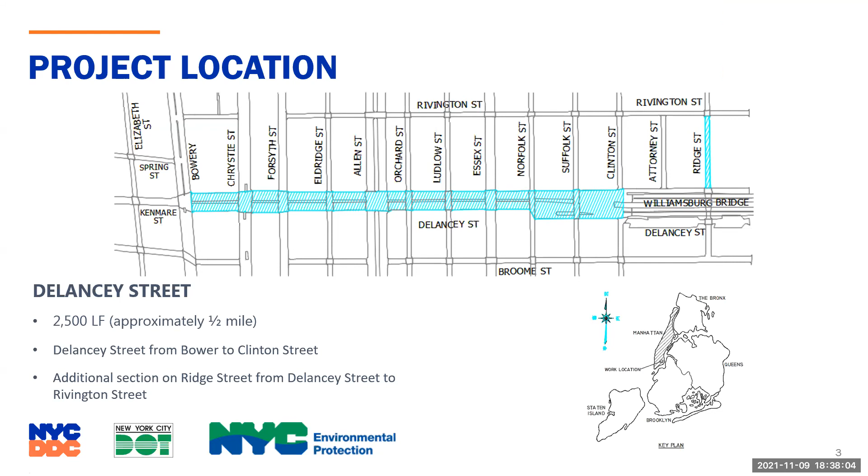So here's the project location. It's about 2,500 feet, about a half mile, from Bowery to Clinton Street up to the entrance to the Williamsburg Bridge here. And then there's also a small portion on Ridge Street from Delancey to Rivington for some small roadway improvements.

Some of the changes, like I already mentioned, the marked one-way bike lane and two-way bike lanes, will be built out permanently. Some of the painted curb extensions will also be built out to increase pedestrian safety. And the new bike refuge area on Allen Street, built in late 2019, was already implemented as part of the design.

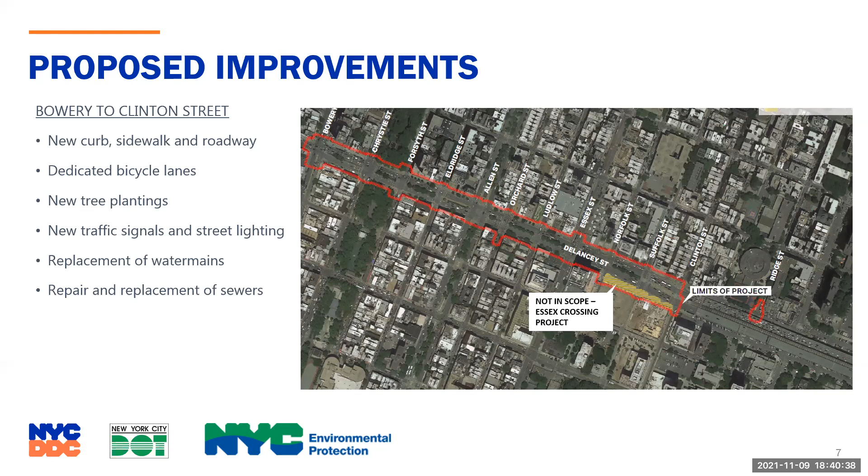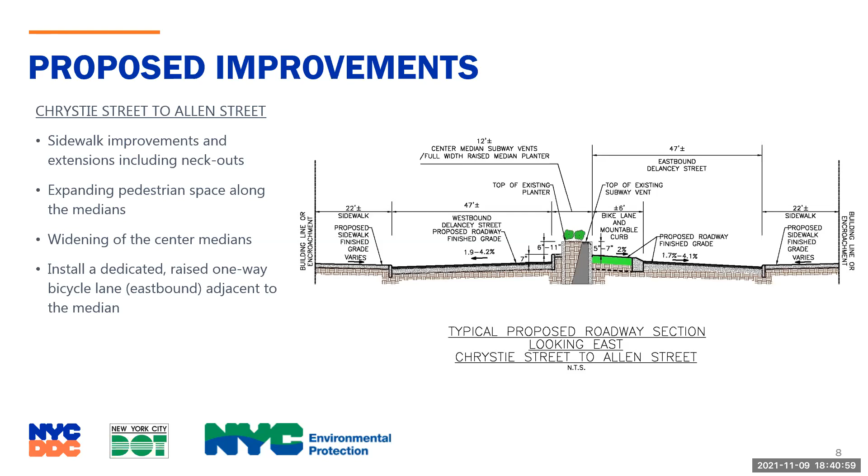Here's a nice cross-sectional view to better understand the bike lane's relationship to the median, again from Christie to Allen. The one-way bike lane will be raised and protected by a mountable curb. On the two-way bike lane, this will be protected by the concrete barrier with an additional railing on top of it as well.

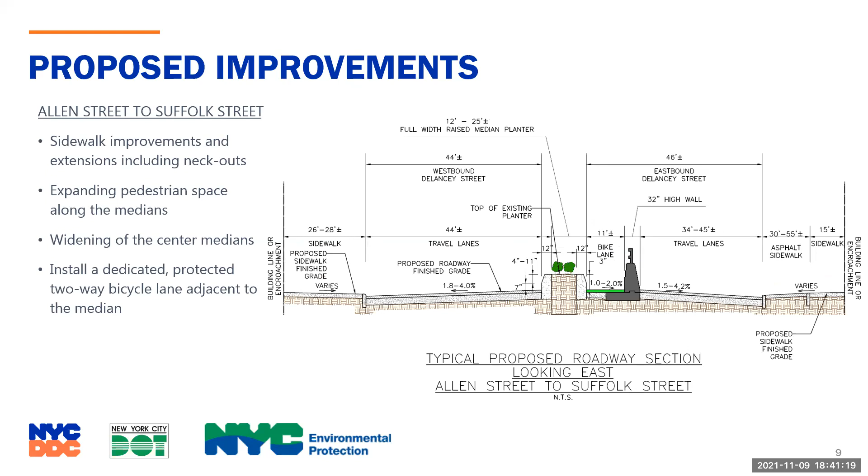And then throughout the corridor, various sidewalk extensions, bump outs, neck outs, and median extensions too, to increase pedestrian safety throughout the corridor.

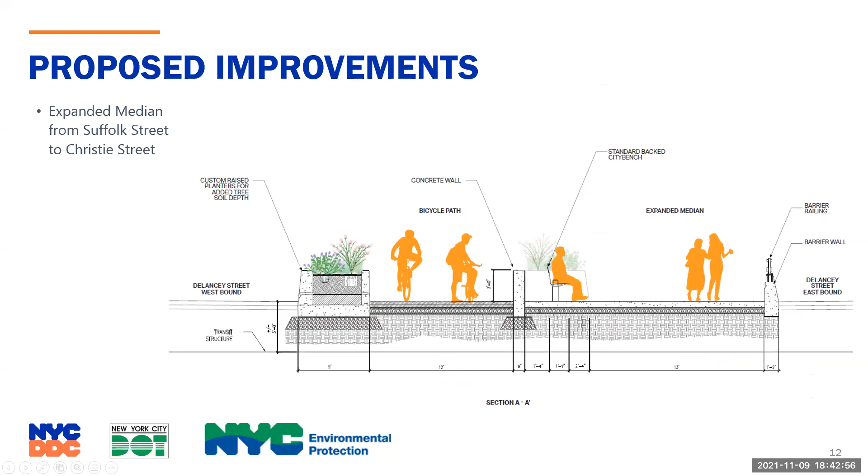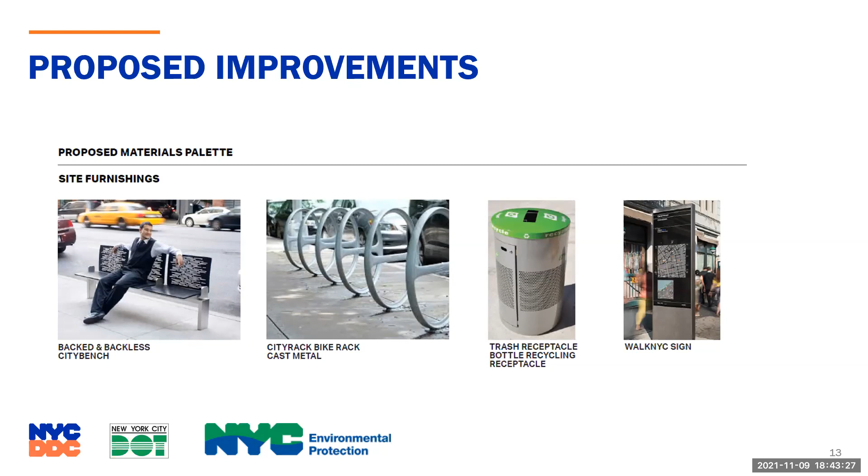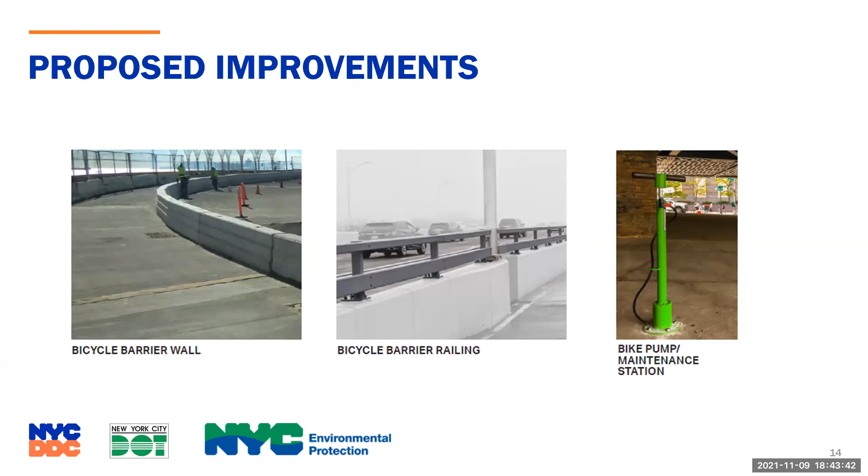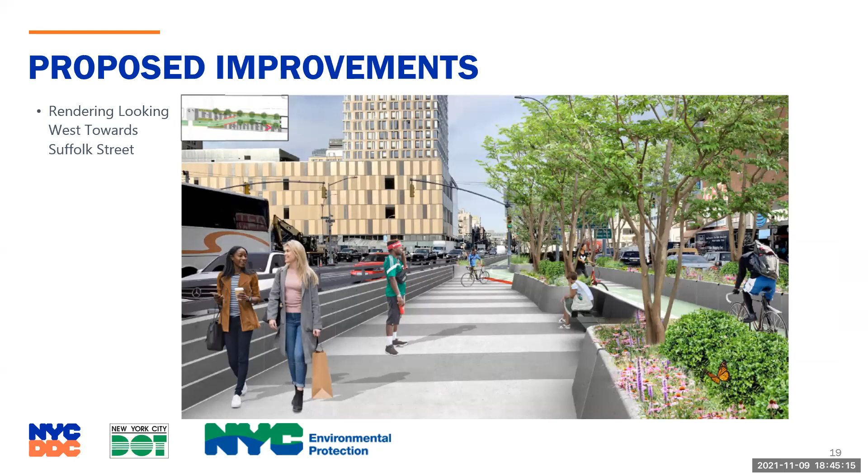And then here's a nice rendering looking west. This would be coming right off the Williamsburg Bridge going into Manhattan. You see the bicyclists coming in to the right, and then the pedestrians in their area on the left, all protected from the vehicular traffic.

And then one more rendering going towards the bridge. Here we see the city racks, the bike pump, and then that pedestrian crossing area for the bike lane, all clearly marked out and delineated.

So here's some community impacts during construction. These will all be temporary. We'll have some roadway lane closures, temporary loss of parking, relocation of the 2 bus stops, potential water main shutdowns, and nighttime and weekend hours, pending NYC DOT OCMC stipulations.

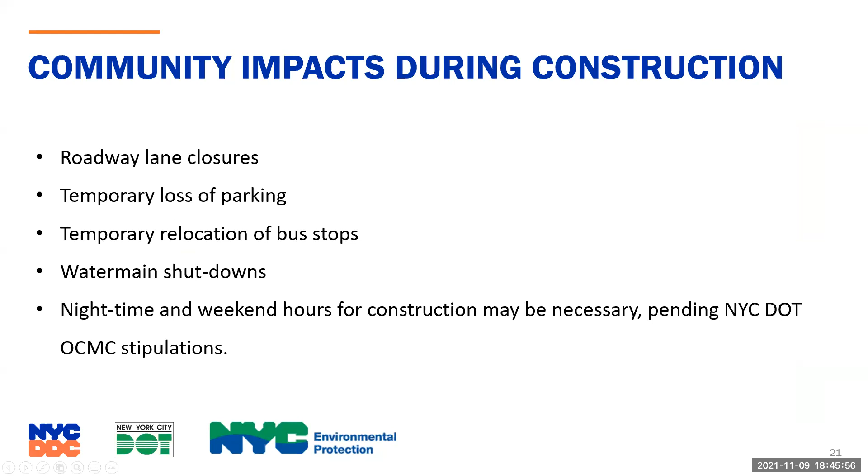And as part of DDC's effort to keep the community involved, there will be multiple measures: project information cards, advisories, weekly bulletins, and newsletters to keep you updated with the progress and construction throughout.

And some other projects that we are coordinating with nearby: we have the Williamsburg Bridge Rehabilitation Project coming up summer '22 to '25, the Essex Crossings expanded median from Suffolk to Clinton Street, and also there's a New York City Transit project at Forsyth Street we are coordinating with.

So project funding for the costs, latest estimate: we have the City and FHWA funding for the roadway work at about 34 million, and then the utilities work from DEP coming in at about 7.6 million.

And lastly, here is our current schedule. We have our presentation to you now, November 2021. We're anticipating design completion in June 2022, with construction to start spring 2023 for a 4-year duration ending in spring 2027, pending on, again, the DOT OCMC traffic stipulations.

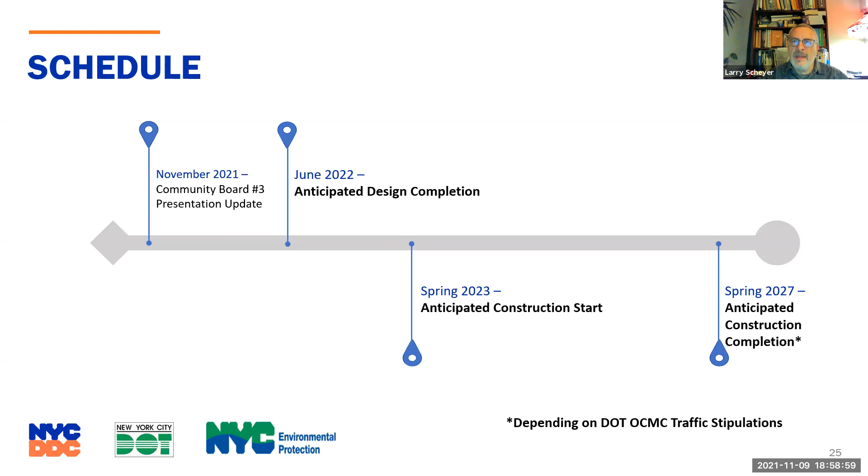And I believe I want to go west. I want to go west. I want to go on Kenmare Street. I'm sorry, let me just jump in. Is there a possibility you go back to that slide that has the layout for further clarification?

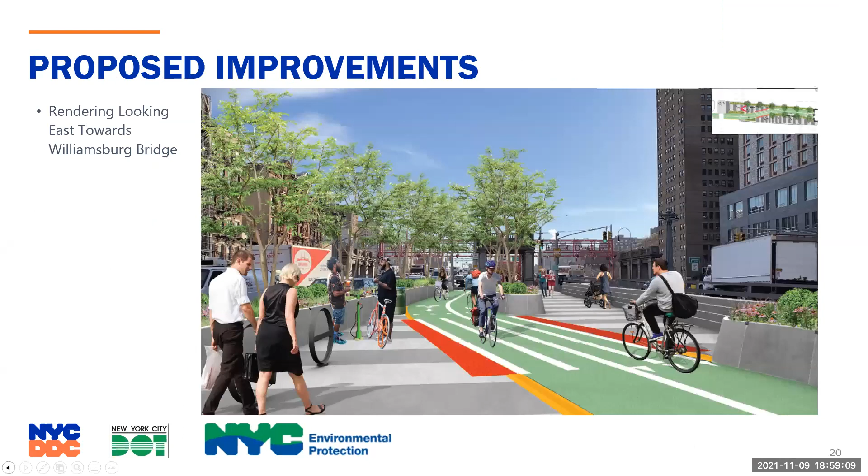I believe this picture is the bicycle refuge at Allen Street. So it's only one way coming from the left, following my mouse here, going to the two-way bike lane towards the Williamsburg Bridge. So to go west towards Kenmare Street, you'd either have to go north or south on the bicycle lanes within the Allen Street median to go left.

Okay, well, what information is provided as to how to proceed west? Again, I'll have to defer to DOT here for the bikeway design, but...

My comment is it really would be desirable to make it safe as a straight shot, paralleling the way that one travels east toward the bridge. It's simplicity in itself, and it's what an ordinary person is going to want to do. And unfortunately, if they're going to be in heavy traffic, that's not the meat grinder that would keep them safe.

Hi Larry, this is Kimberly Ann from DOT. Hi Kimberly, how are you? I don't know that we have someone on from our bike team, I'm not sure they were able to join us tonight. But I think it's a great question, and I don't have the background on why this particular project ends there. I know it's building out what we've already put in the ground and interim materials, but we can certainly look for that answer and get back to you.

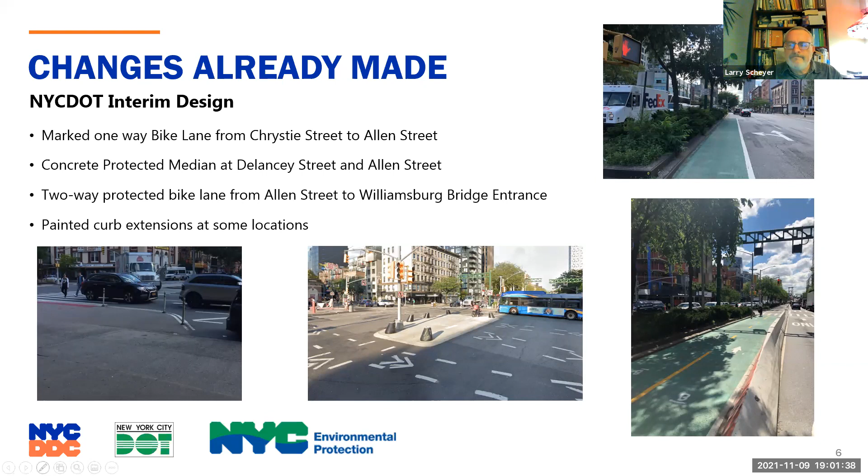And the last thing I wanted to ask about, maybe somebody else can follow up on it, was how you plan to deconflict, in front of between Suffolk Street and Clinton Street, the pedestrian and bicycle crossing. Right, shown by the red. Yeah, so this crossing will have signage, and then also the red and yellow delineators serve to mark out the bike path from the pedestrian area.

You know, what worries me is that somebody not paying attention will hit somebody in a perpendicular manner and cause an injury.

It looks like as DDC works through the final design, there's probably some special adjustments that we can make, making sure that the visibility is there, any additional markings like adding rumble strips or flashing lights, something that will get people's attention so they don't just wander through or speed through. I think we can add some of the standard treatments we do for bikes at pedestrian crossings like this and work with DDC. The bike lane in this case looks fairly visible for pedestrians crossing, but we'll certainly work through those details with DDC. This reminds me of what you have in Hudson River Park and the crossings of the bikeway there.

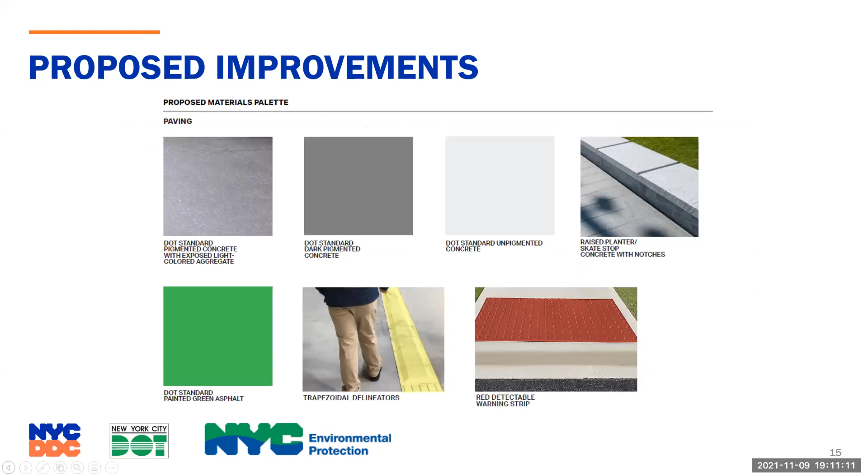Hi, thank you. Looks like a beautiful bikeway, and it's going to be really nice when it's done. I also have a concern about the raised part of the bicycle lane. If someone's going to fall off, it's going to be me. Anything the city can do to prevent cars from parking in bike lanes or veering into bike lanes, I'm 100% there. I drive and bike all over the city, and the Clinton Street that goes over Grand and to Delancey, there's always cars parked in, always. I don't know why that is, but whatever you can do to keep that from happening is great, and whatever you can do to keep me from falling off is also appreciated. That's all I have to say.

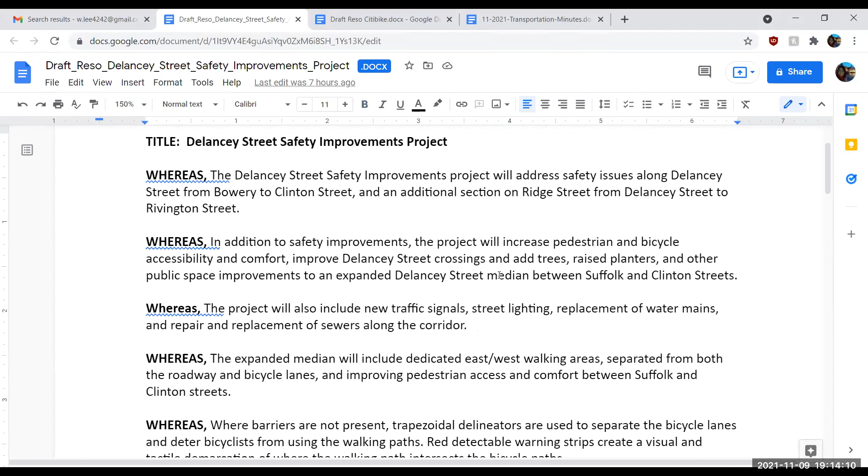If you want to chop this up a little bit, if there's anything you want to add based on the information you've heard tonight, based on concerns you've heard tonight, let's do so. I think this is pretty comprehensive. I want to thank Susan and Calvin for putting this together with the information they had.

You want me to read through it, or you want us to go and attack a specific whereas or resolve clause? Committee can jump in at any time.

Do we want to add anything about asking DOT to look at improving the safety corridor west of Allen Street towards Kenmare, or not? Any disagreement with that? Is that language you want to put in?

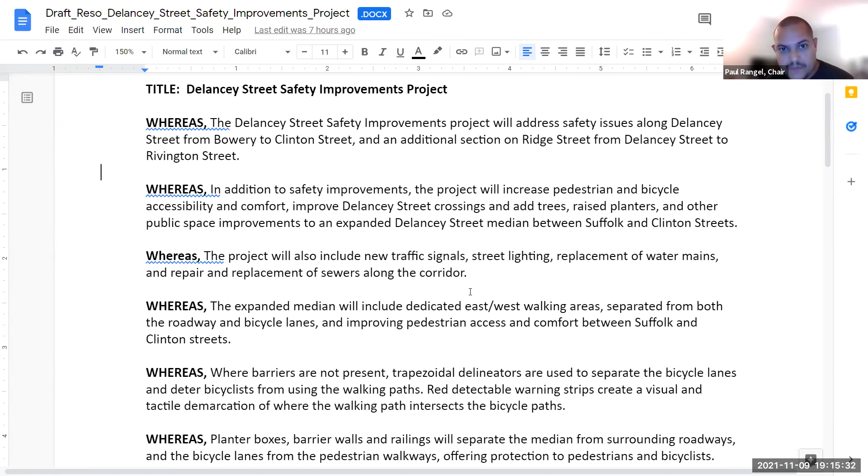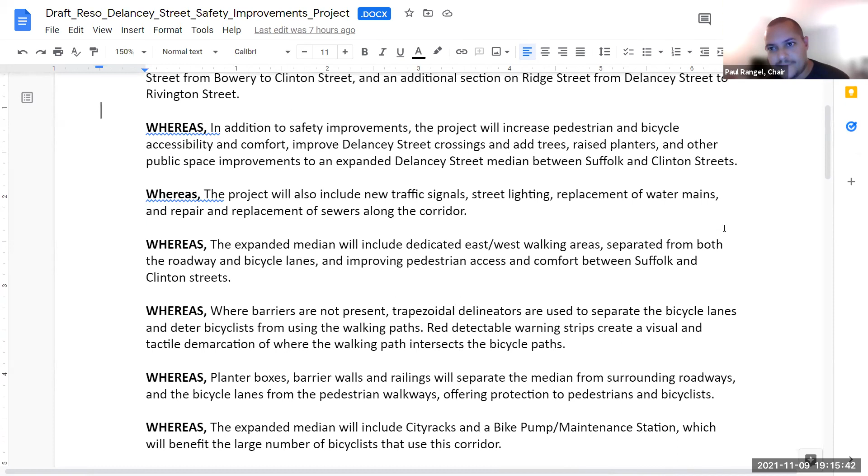Michelle, go ahead. I'm drafting an amendment to add for that, so I can send it in the chat in a second. Look at that, thinking in sync today. Lee and Michelle, it's a tag team right there.

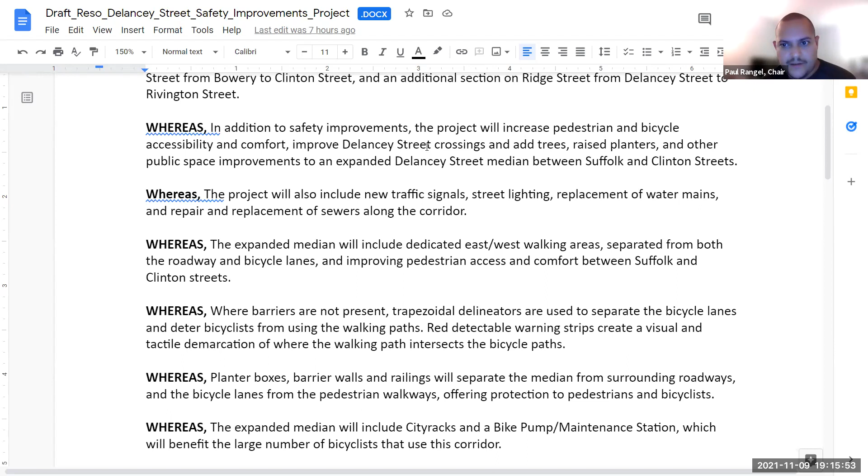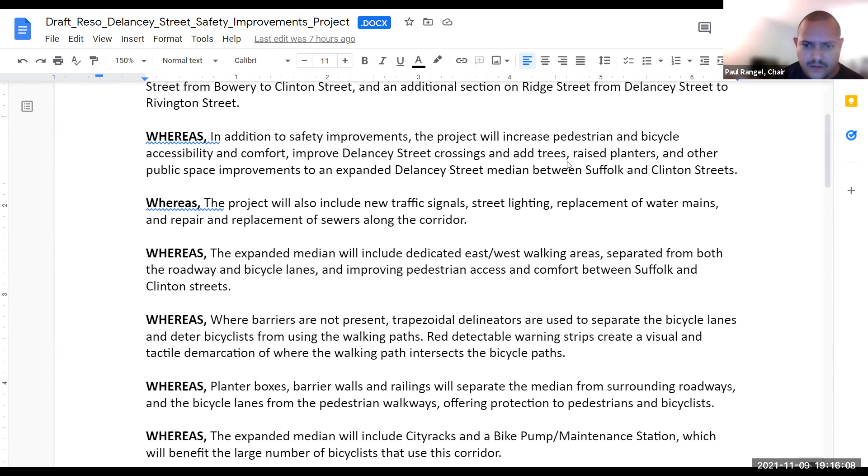So I'll wait on that and see how we insert it. Is there something else that we should be putting in? Oh, hold on, let's read this up first. It's in the chat, I can read it. Therefore, be it resolved that DOT should consider adding a westbound protected bike lane west of Christie Street.

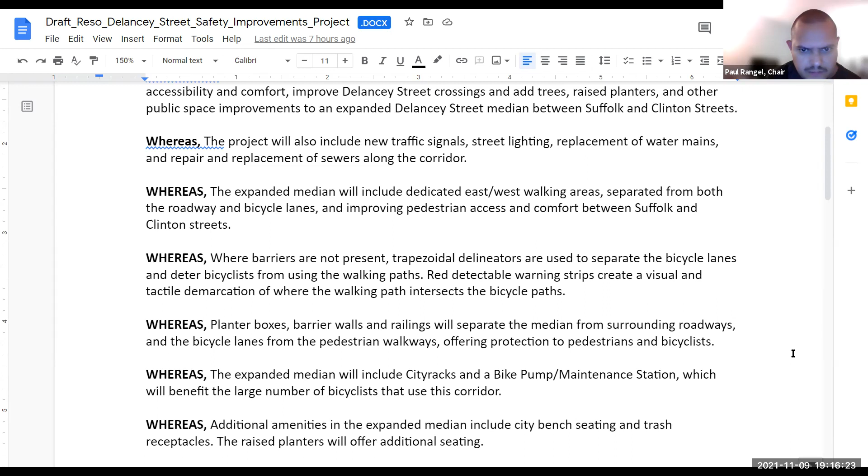Okay, do you have that, Wendy? You can just copy and put that in. So I make a motion to add this: therefore, be it resolved. Is there a second? Second. Any objections to putting in this resolve clause?

Is it west of Allen Street? Actually, did I mess up? My confusion was it west of Christie or Allen? I know there's some questions about going to the Bowery and stuff like that. So was it after Allen? I'm going to go back to Mr. Wald here - you mentioned it earlier. Was it west of Christie or west of Allen?

Larry Sherritt said it's a one-way eastbound between Christie and Allen, but there's nothing westbound between Christie and Allen. That needs to be a pair of bike lanes there, and there's nothing at all in the plan between Christie and the west of Bowery. So it's west of Allen, between Allen and Christie. Is it Allen and Christie or Allen and the Bowery? West of Allen. We just put west of Allen. Fine, okay.

I know I kind of just opened this up a little bit asking a community member for their input. Mr. Shire, I'll quickly go ahead with your comment. And to clarify the prior comment, also suggesting looking at extending in both directions between Christie and the Bowery. Okay, alright, thank you. You're welcome.

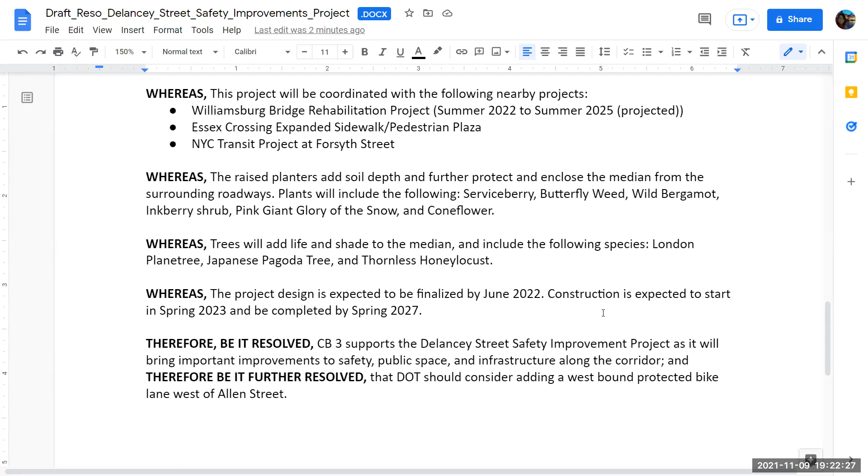Okay, I believe Colin tried to say something about that, did you have feedback? No, again, I have to defer to DOT. This is something they'll need to work out with their bike group for where they're going to put proposed one-way or two-way lanes, and how it connects to their larger bike network throughout the city.

Yeah, so the thing is, there's obviously a trade-off sometimes between avoiding traffic congestion and creating protected bike lanes. I want there to be flexibility for that trade-off. So I'd like to say adding a westbound protected bike lane west of Allen Street, all the way to the Bowery, if possible, if you've written that.

And also here, extend the eastbound lane to start from the Bowery to Christie, and all the way to the Bridge. See, there's a block there. I think it's a block of eastbound missing, and there's several blocks of westbound.

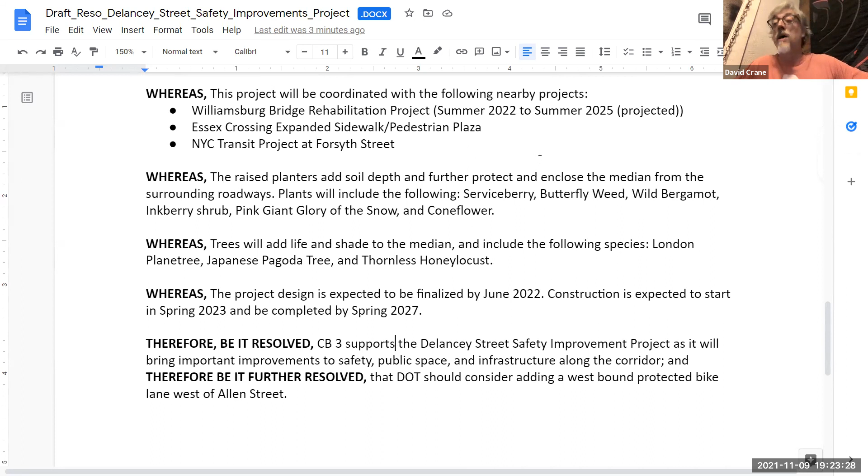Might just want to simplify it and say two-way bike lanes existing between the Bowery and the Bridge. I think we have language for that right now, Michelle just sent it over to me. Therefore be it resolved that DOT should consider having a two-way protected bike lane for the entirety of the project between the Bowery and the Williamsburg Bridge.

Great. And then can we add, perhaps at a minimum, there should be street markings to indicate shared lanes where dedicated lanes are not possible?

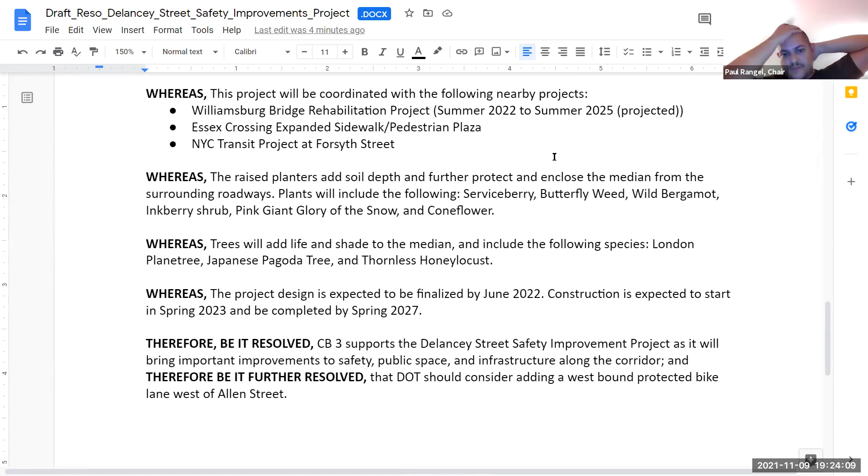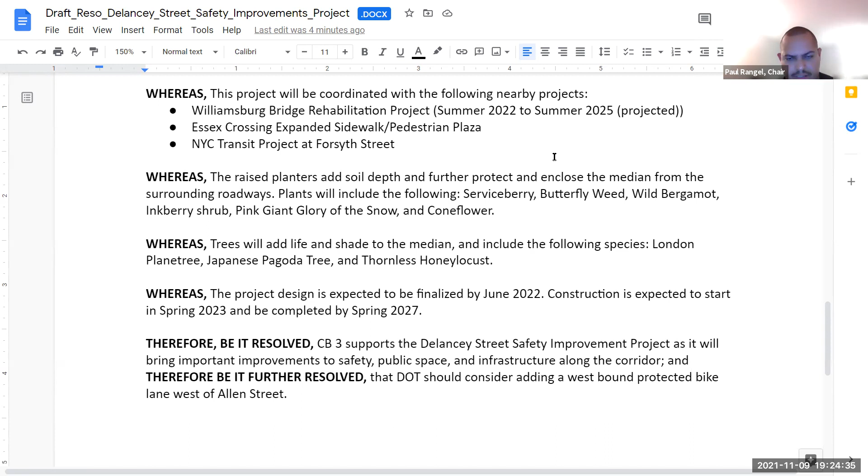Hold on, let's backtrack for a quick second. Are we going to get rid of this further resolved and replace it with this new further resolved? I'll type it into the chat, give me a second. I sent it to Wendy. Oh okay, Wendy, just put it in so we can see it on the Word document.

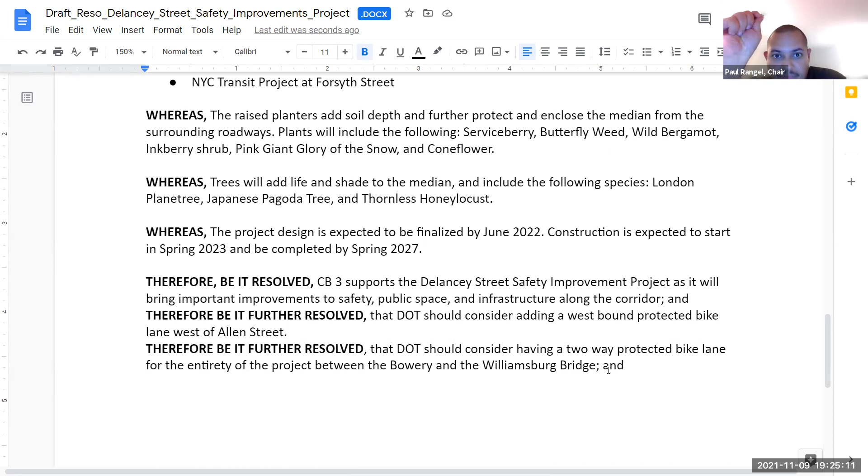So David, help me out here. We just said yes to putting in this further resolved as it was with the west of Allen Street. We're going to replace the Allen Street one with this specific resolve clause. Yes, I would like to see that. Okay, committee, everyone in favor of replacing the previous further resolve clause with this one? I'm not hearing any objections, so the new one stays in, the second one comes out.

All right David, your next point. You're on mute now, take yourself off mute. Me? I thought I was done. I thought you had a second point you wanted to bring up, you said you wanted to add something on? Oh, you know what, I don't know.

I don't know if we need to go into the details of what I was talking about. I think DOT or whoever's planning this, the lead agency heard me. But at a minimum, there should be street markings where a dedicated lane is not possible. We could add that phrase, and that would be a good addition here. Right now there isn't, and we actually got kind of caught between cars, and it was like, what's going to happen next?

Partly because there's a lot of curb lane activity happening for that last block or two of Delancey. I don't remember exactly what it was, but I remember suddenly feeling that—if you cycle, you know the feeling where you're suddenly stoked for action because you're not sure what's about to happen, because you're kind of stuck. That definitely happened there, and shared lane markings can help.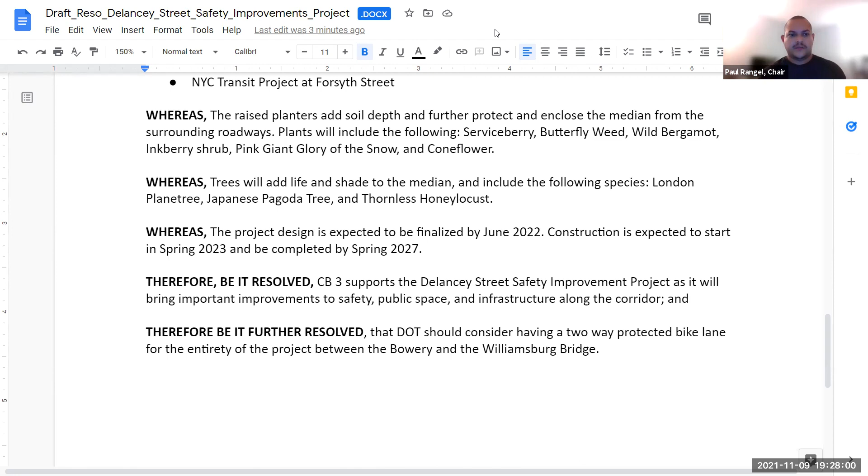Are we good as is? Any objections to this resolution? If not, this is going to go through. I'm hearing no objections, so I don't need to take a formal vote, right, David? I can just go right through with it. Sure, if you want, you can pass it without a formal vote, but there's so few of us also. Yeah, okay, so we're going to move through it. This is fine, this is passed, then we'll come up with it.

Thank you, that was good. All right, so let's go to our next agenda item, which is the Citi Bike infill.

I have Mabel Kessler and David Andrew presenting for the Citi Bike infill. That's why I have this listed.

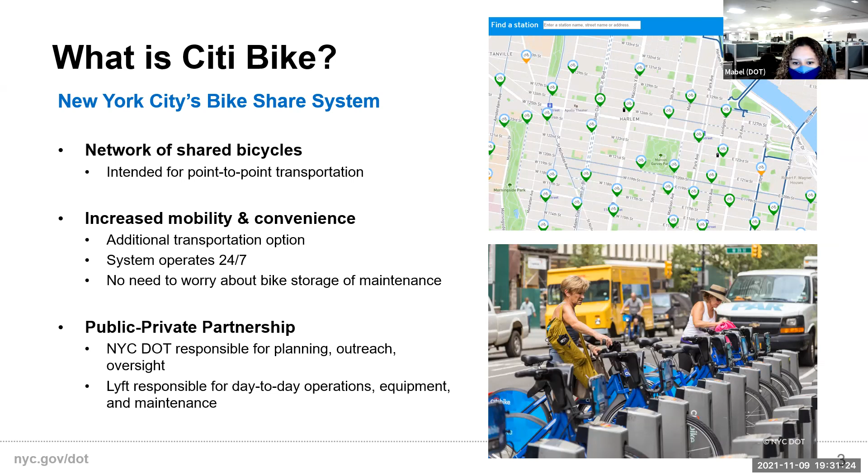Citi Bike has been in operation since 2013. It launched in Manhattan south of 60th Street and in parts of downtown Brooklyn, with 330 stations and 6,000 bikes. Starting in 2015, we expanded the system and more than doubled its size by the end of 2017. The system expanded to the Upper East and West Sides of Manhattan, deeper into Brooklyn, and into Queens for the first time.

In 2019, Lyft acquired the system and we began our Phase 3 expansion, a major investment that will more than double the existing service area to 70 square miles and triple the number of bikes to 40,000. That will make this bike share system the largest in the world outside of China. Citi Bike is now in four boroughs and continues to expand into new parts of the city while adding capacity to the highest-demand areas.

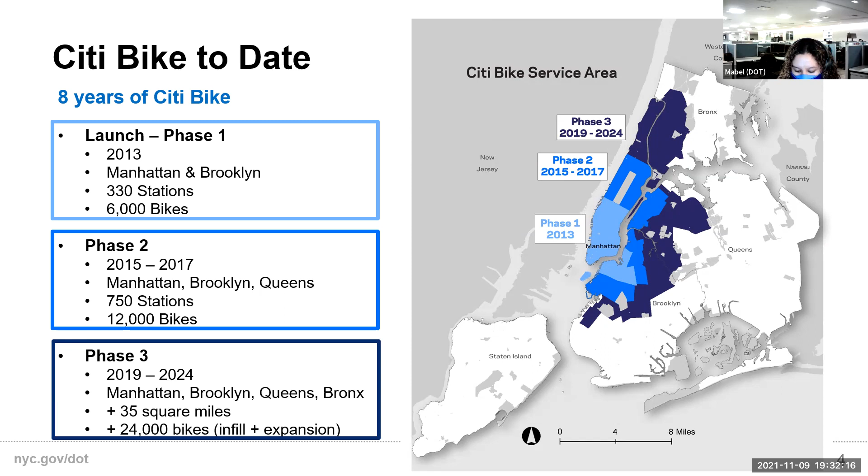And the system is very popular. Since its launch in 2013, there have been over 135 million trips taken on a Citi Bike. The program has over 165,000 annual members. And during the busy summer, spring, and fall months, we routinely see nearly 100,000 trips a day. In 2021 alone, we saw multiple 120,000 plus ride days. And even despite the COVID-19 pandemic, Citi Bike ridership didn't collapse the way that other modes did and was at 95% of 2019 levels.

So now we'll discuss a little bit more about our phase 3 in detail, which consists of 2 distinct but related efforts: the expansion and the infill. Expansion brings Citi Bike to new parts of the city and is nearly halfway completed, while infill adds capacity to the phase 1 and 2 service areas, which are shown in gray in the map. We anticipate completing installations for all of phase 3 by 2024.

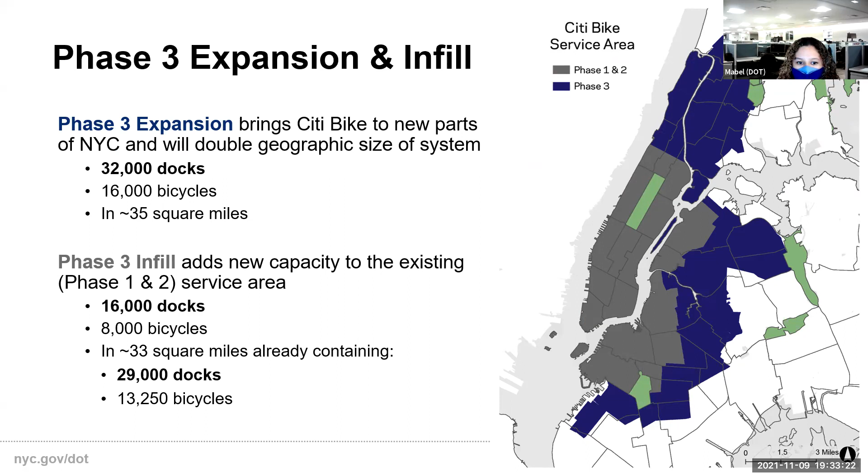So now we'll talk a little bit more about why we need infill. New and additional dock capacity is needed in the busiest parts of the phase 1 and 2 service areas to support increased demand as the system and the ridership grows, and also to meet existing unmet demand. Infill helps the system function. Rebalancing alone is not enough to accommodate the increasing demand, so infill is critical to improve overall operations.

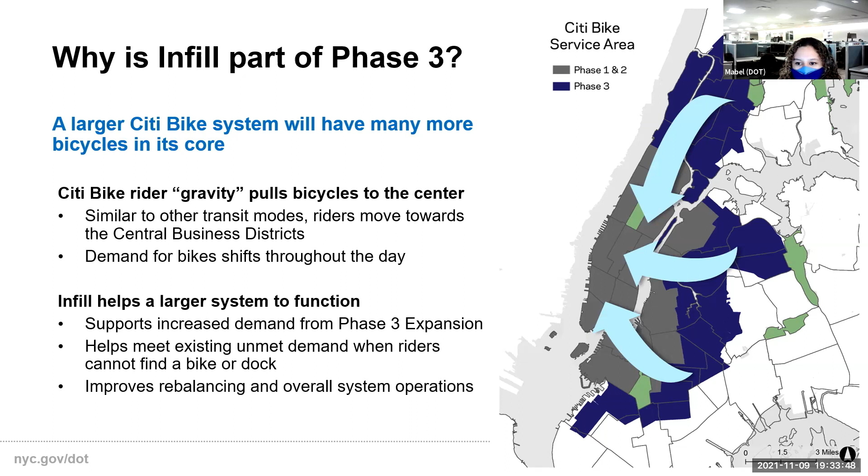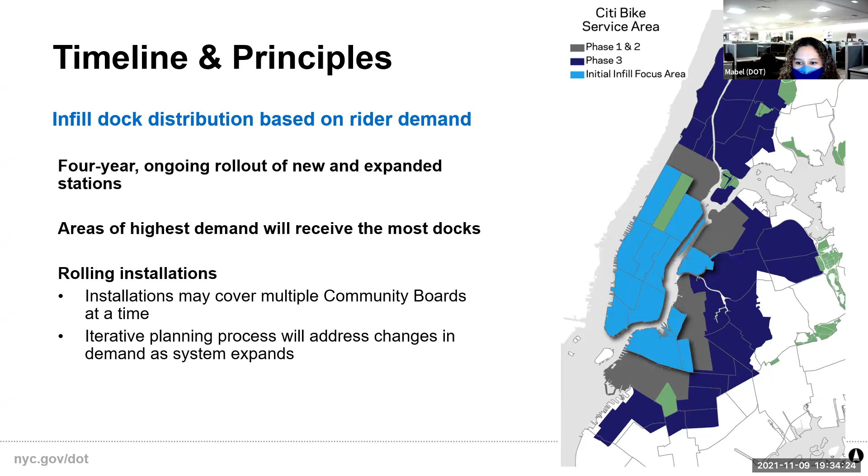So we're adding 16,000 docks to the system over the course of 4 years, and we're in year 2, so currently about 35% completed. Site selection for infill is driven by demand and filling network gaps where we don't have stations within the service area, and we'll discuss this in a bit more detail. Infill is a rolling and iterative process. We work in multiple community boards at a time, and this really helps us meet rider demand as the system continues to expand.

For our planning process, we combine a number of inputs. We incorporate community feedback via our online feedback portal that is open throughout the duration of phase 3. Our data-driven demand modeling and spatial analysis, as well as our technical on-the-ground siting criteria, shows us the best places and appropriate sizes for stations to ensure that we're meeting demand. And we work together with Lyft and the folks at the Manhattan Borough Commissioner's Office to notify community stakeholders and adjacent property owners in advance of installations. Once installations begin, our stations are monitored and maintained over time.

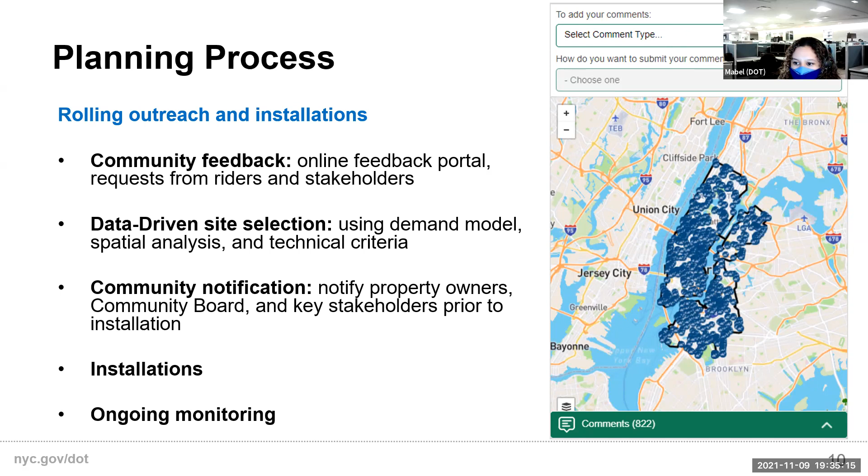So now we're going to take a look at our infill planning process and identifying where infill is needed. Our high-level goal for infill is to improve the system by reducing the instances where riders can't find a bike or a free dock. To help us with this, we created a model that looks at existing ridership patterns and identifies areas where we need to increase system capacity to meet demand.

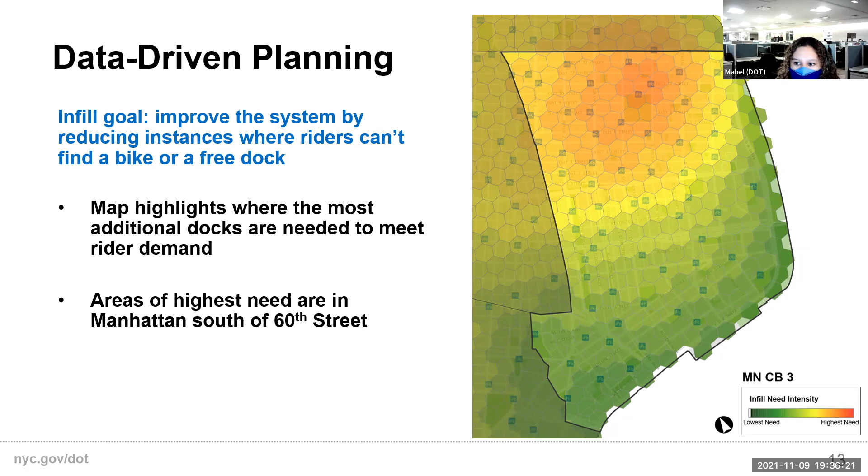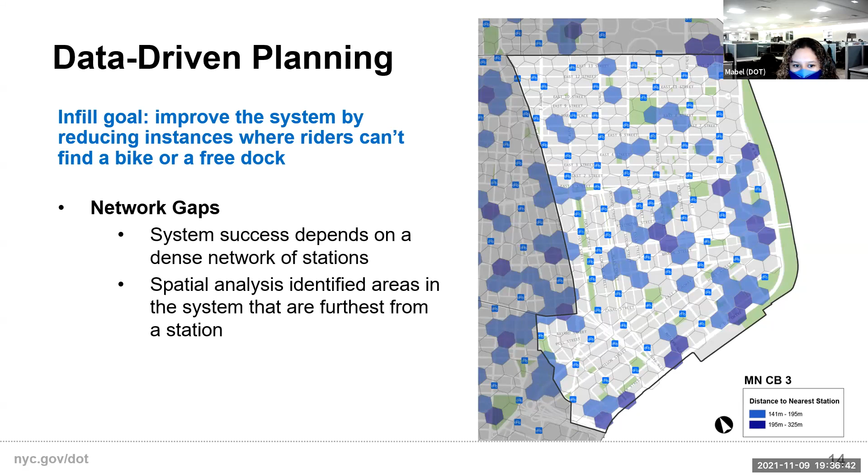One of the limitations of this model is that it measures demand where there are existing stations. And as we know, there are some areas where we do have network gaps. So we have a spatial analysis to define where we currently have network gaps, which means that there are areas in the system that are furthest from a station. So we used these 2 layers, the demand map and this spatial analysis, to create an informed station siting and sizing tool. So here you can see the two layers overlaid.

So as per the demand model, in Community Board 3, we need about 1,800 more docks to meet the demand that we've currently measured in this board. And within this proposal, we're proposing 683 additional docks, and that'll be in the form of reinstalling stations, station extensions, equipment swaps, and new stations.

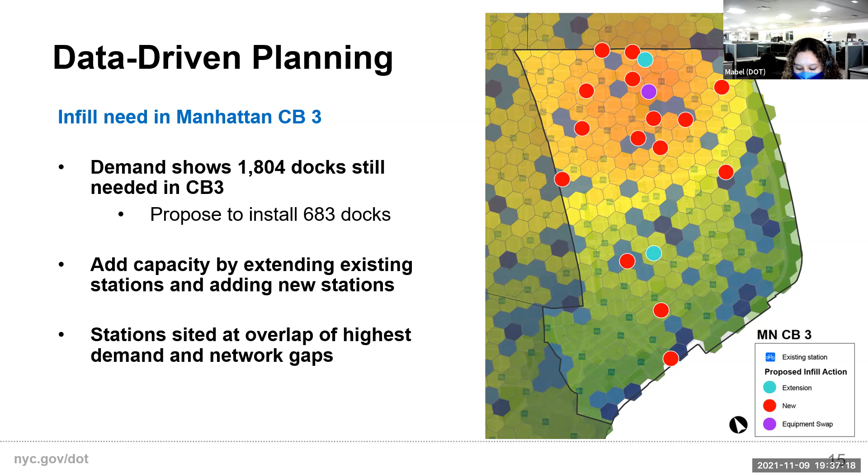So these next few slides will just go over the different infill proposals that we have for Community Board 3. Please note the key on the slide. Each number on the map corresponds to the site and its place on the list, and the different colors correspond to the infill type. Teal is for an extension at an existing station. Red is when adding a new station. Purple is for an equipment swap at an existing station. And I can explain that more when we're talking through the particular site.

And so I'll just start reading through, and after I go over the sites, we'll have time for comments and questions on any of them.

So the first one I'll start with: we have a sidewalk station on the north sidewalk of South Street at Pike Street, and then we'll be adding a roadbed station on the east side of Rutgers at Henry Street, and also a roadbed station on the west side of Orchard Street at Grand Street. For this existing station at Norfolk and Broome, we'll be extending that sidewalk station.

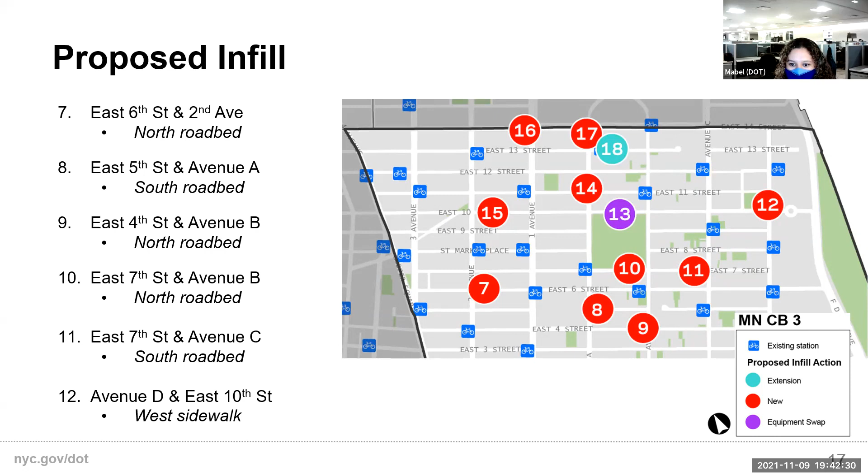All the parking we've already lost. And these are a lot of stations you're putting in. Okay, thank you. Thank you, Danielle.

Okay, Susan, I saw your hand. Go ahead. Thank you.

So just to give a little background on this, DOT did give Kelvin and me a preview of what this was going to be, I guess about 2 to 3 weeks ago. And my objection at the time was that we needed to give information to the community board and the community ahead of time to really be able to look at these sites. We're not approving them, but we're giving input. And I will tell you, sometimes they're very good locations. Sometimes if you know the area or use the area, you will find a certain location is not the best for that area.

There's no question there's a demand for more Citi Bikes. During rush hour, they're all gone, and we do get complaints that there's not enough installations, but we will also get complaints about where they're placed. And even in the preview that we got in the office, we had photographs. You really can't tell from East 4th Street and Avenue B.

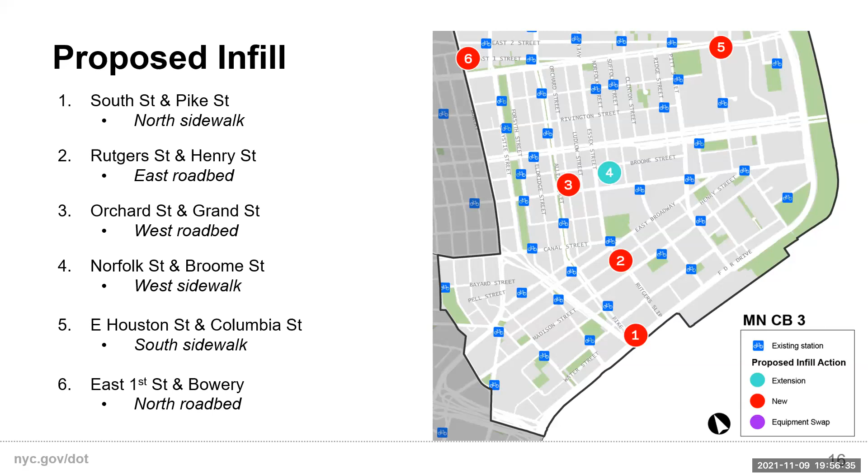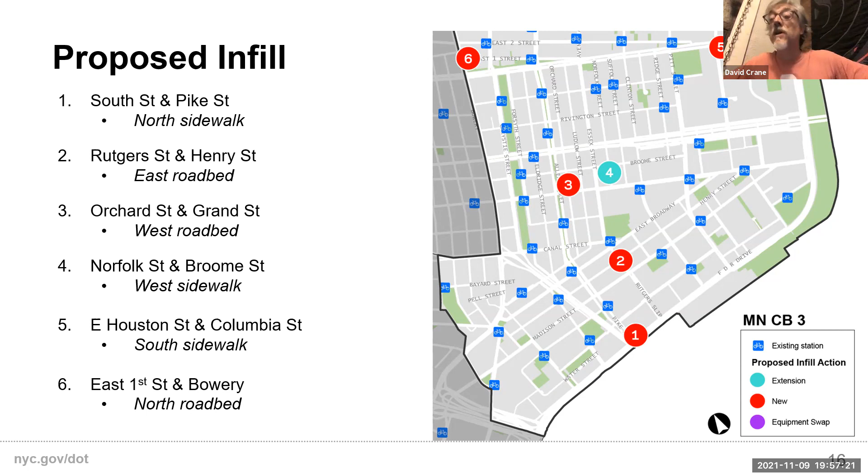I was actually going to ask, what is the process that DOT has for determining that something is a problem and relocating it? I had always understood that was one of the strengths of this program, that you could relocate and put things in more rapidly. I appreciate that this proposal is driven by an analysis of gaps in the system, and I think it's great. But I'd also like to understand, and the public to understand, how something would be relocated if, for instance, it was in front of a senior center, or when you realize there are issues like curbside shacks. What is that process, and how often is it done?

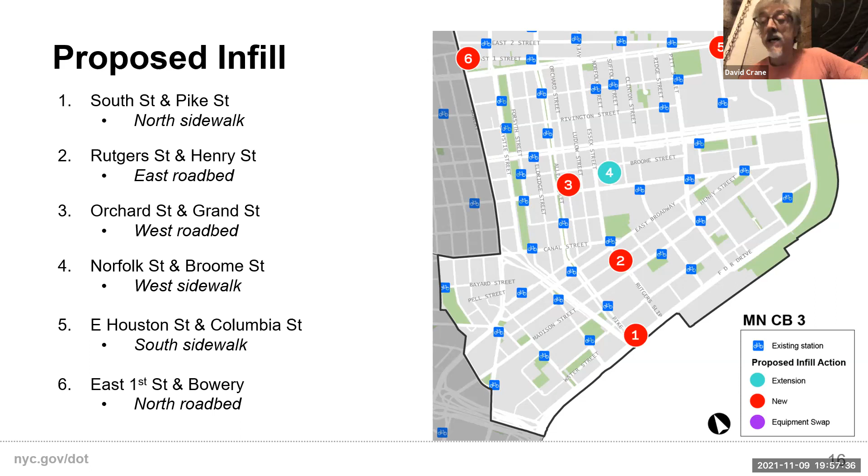We do it on the ground. For all these stations, we're on the ground siting them to make sure they're technically viable, that they're not cutting in front of any curb cuts, where pedestrian access to the street is, or in front of specific access zones, loading points, or hydrants. We work with FDNY to make sure the stations are in suitable locations that we've determined we follow. We also take into consideration adjacent property owners, and reach out to them so they can let us know what operational challenges could arise from station installations.

Interesting, so you've gone through that process for all these locations. For the property owners, we'll be starting or continuing that following this presentation. You have not always done that, and it's not always done? That's always part of our process. Yes, that is a standard part of our process since we've been in operation. We always notify the adjacent property owners.

And have you surveyed these 16 or 17 sites? Yes, all of these sites have been surveyed for technical viability, making sure we're keeping clearances, siting them on streets and sidewalks of appropriate widths to maintain travel lane and pedestrian clearance, and not crossing over utilities, hydrants, driveways, or curb cuts.

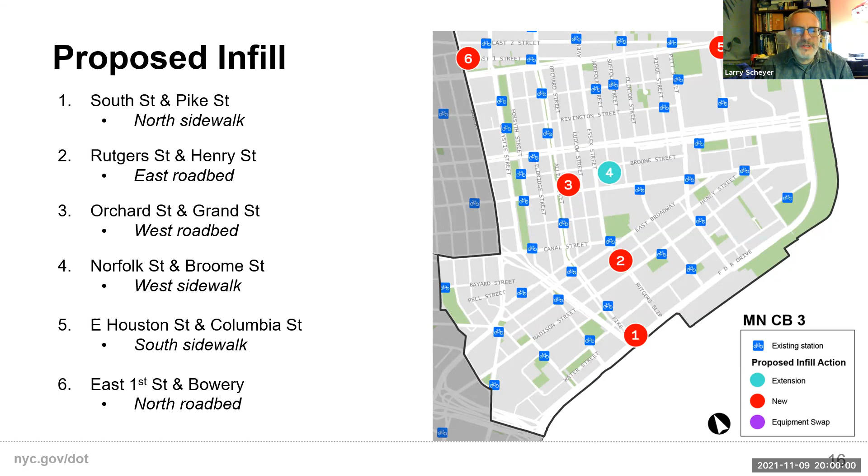Would you pull up 16, 17, and 18, the descriptions? Okay. 16, East 14th Street, First Avenue on the south sidewalk, that's the southwest corner. That looks very good.

17, Avenue A, East 14th Street, West Roadbed, also extremely helpful because this morning between 10:30 and 11 I wanted to get a bicycle. Thank you for bringing back the station at East 13th Street and Avenue A. Unfortunately, there was no working bike there, no bikes at number 18, so that needs to be expanded.

Are you from Stuytown, Cyan? Oh, okay, cool, apologies. All right, the lights turned off in the office, so I need to go turn them back on for a moment. All right, I'll wait for her to turn the lights back on. The party's not over just yet.

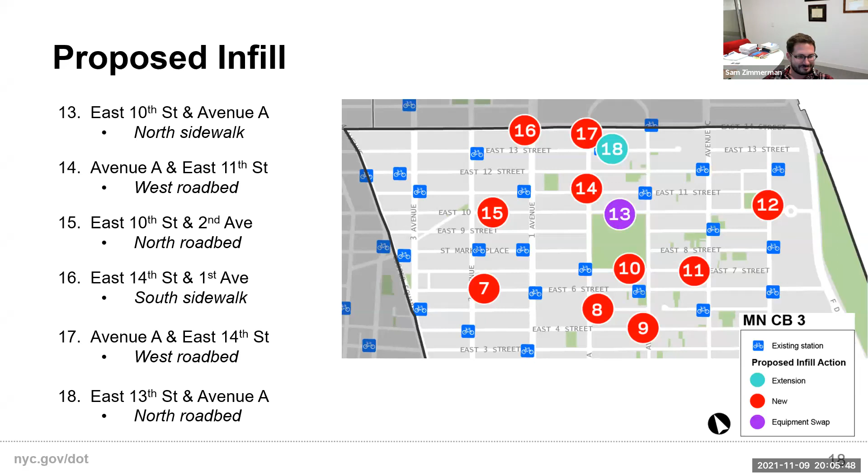I'm going to give an example of a major property holder that was not consulted, and that was Village View on First Avenue. Their lawyer actually contacted me because they had Citi Bikes put on the inside of the sidewalk, so that people taking and returning bikes had to use the sidewalk while people were trying to go north and south on it. Jennifer did work with me and we had it moved to the roadbed, which has proven to be fine. So I want to reiterate, this is not about not siting locations, it's about having them in the best locations.

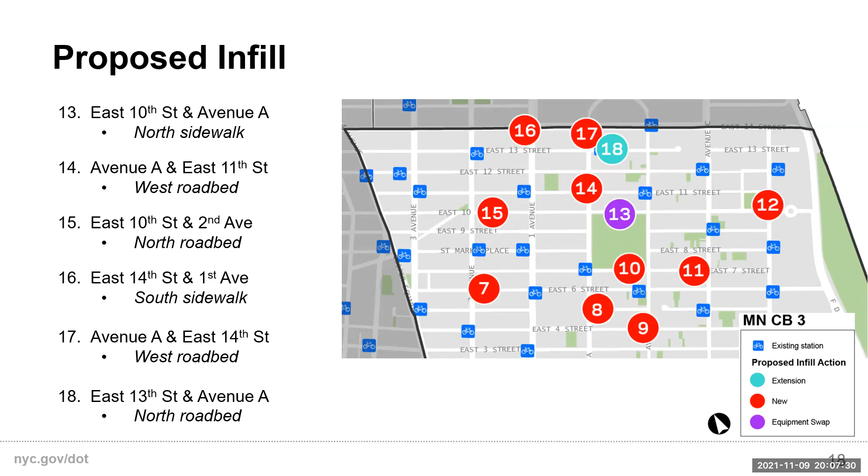And Avenue A, when you say you've surveyed the area, I suspect you've not been on Avenue A on Thursday, Friday, or Saturday night. The people who live there have the best information, and that's why community board input is so meaningful. It's what community boards are for. I would urge not to have anything on Avenue A, to put them all on the side streets. And I would really urge giving us photographs of these and letting us look at them for a month and coming back so we can give meaningful input.

Thank you, Susan. Yeah, we'll definitely take another look at Avenue A.

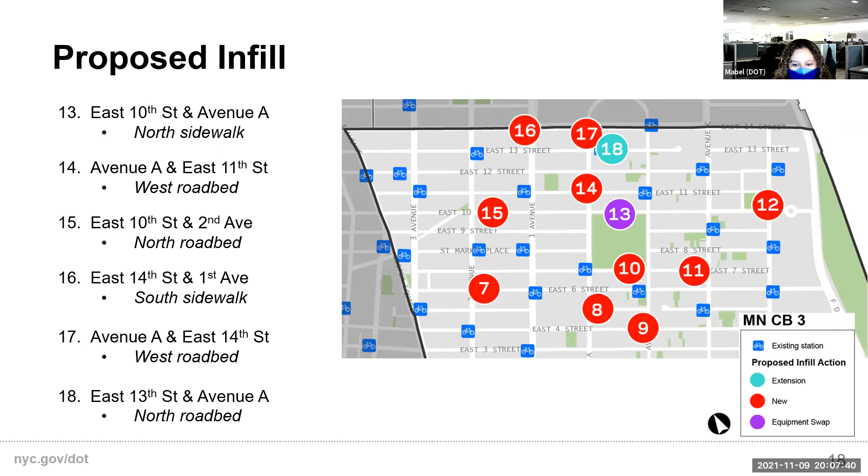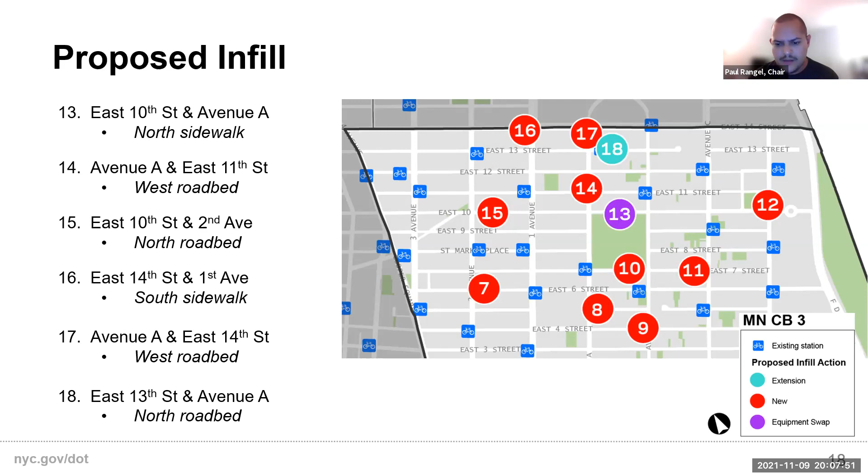Thank you, Susan. Before I move to the next part of this item, I just wanted to say I usually wait for everybody else to ask questions before I ask anything.

So my question is about the website itself, and you're saying data driven. So what's to say the same person isn't plugging in the same locations over and over again, and it's just one person? There are different people who live in this community, in different parts of the neighborhood in this district, and it's like these things are already locked in without change. So it kind of puts us in this bind where we can't offer real input. Ms. Hernandez pointed out, wait a minute, there's going to be something at 4th and B — these are real questions that people have.

Yeah, some of it's individualized based on where you live, but that doesn't make it any less important as to knowing the area. And she knows that area. I know the area around Avenue C. People know the areas below Houston, below Delancey Street. So getting information off the website is not enough as to where these things need to go. That's my take on it, and we'll move forward from there.

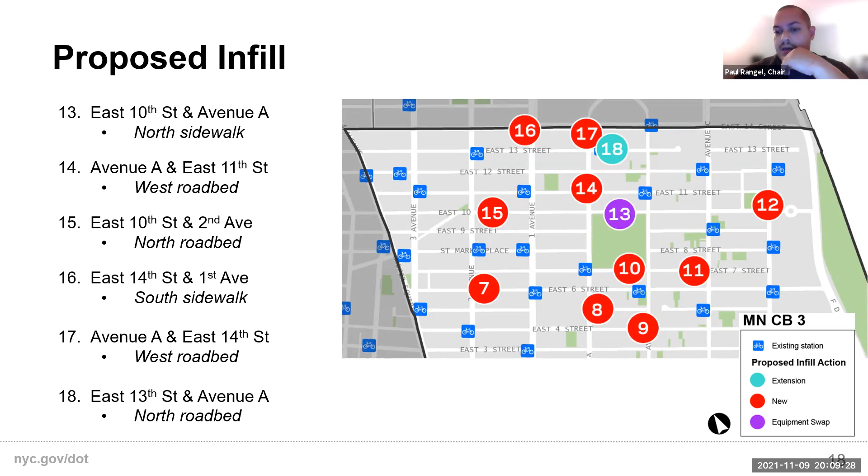All right, for the committee, I sent out, I believe Sunday evening, a potential draft resolution regarding all of this going on tonight in terms of the infill and proposed locations. I know there's a lot of questions and concerns. We've heard a lot of information here tonight. Is there a motion to bring that draft reso to the floor?

Sorry, I have a siren coming through. My apologies. Is there a motion to bring this draft reso that I sent out on Sunday night to the floor? No motion? Anyone? David, you don't want to bring a motion to the floor for the reso?

I didn't read it in advance and I'm afraid of what it says, so no, I'm not going to move it. Okay, all right, anybody else? Yes, actually, I'm going to make a motion that we adopt the resolution. Just scanning it again, okay. We have a motion on the floor, and there's a second. Wendy, can you pull that up, please?

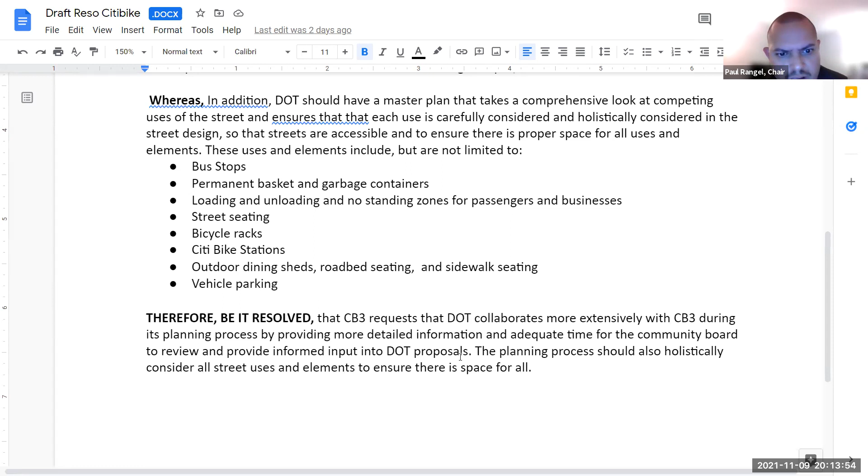Sorry if I went a little fast there. There's nothing after that, right, Wendy? Yeah, that's it. Okay, yeah, that was it. Go ahead, Evan.

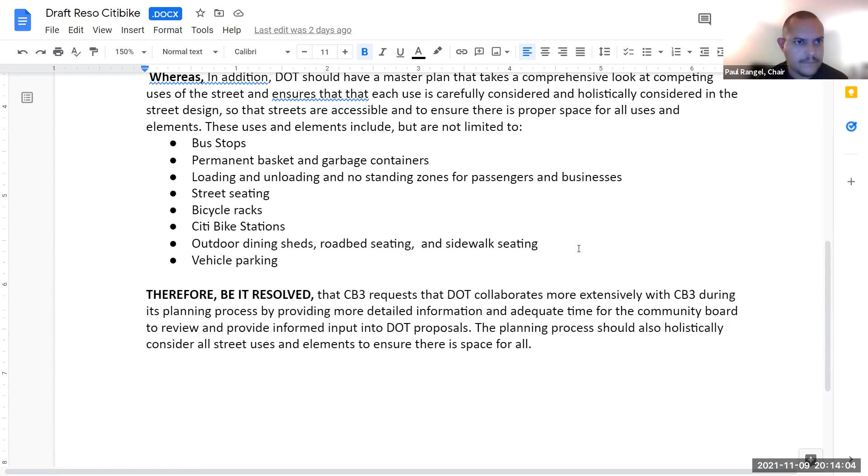This seems like overkill, it's a little over the top. This round of planning has gone pretty much the same as all the other rounds of planning. And as Susan actually pointed out, problematic stations can be relocated. The community board is really not equipped to participate in comprehensive planning. And I'm against this resolution.

Could I respond to a comment that's incorrect? Go ahead, Susan. DOT has changed its policy. They will no longer move a site even if it doesn't seem good. That is their policy. The one I was able to get moved was a very unusual exception.

Both the city council offices and the community board have been told that the original ease of changing it is no longer true. So everything, your opinion and everything else, is of course your opinion, but that one statement is not true. It's almost impossible as policy to change anything.

So DOT, this wasn't considering that the community board should be involved in a master plan. It was asking that DOT have a master plan. I did ask a lot of questions earlier, so I let it slide that I had specifically asked about a process for relocating stations determined to be problematic.

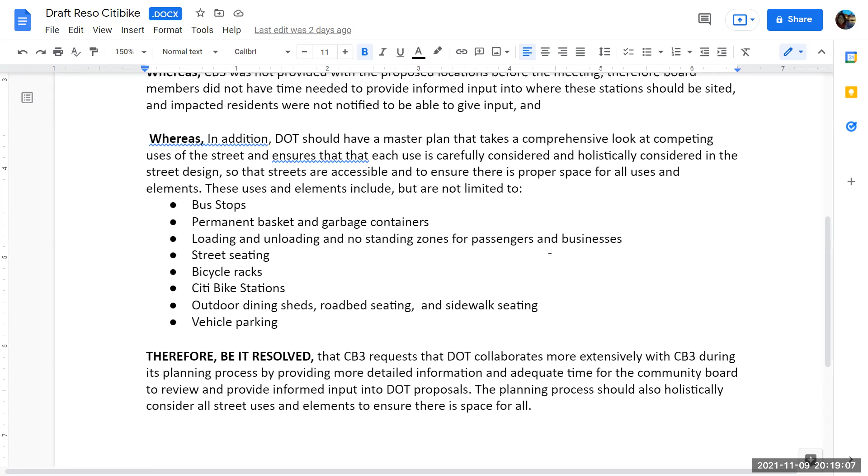Trevor, could I ask you to potentially draft some language right there for it, if you don't mind? Just throw it in the chat when you have a second. I can throw something in the chat, but someone's going to have to work on it. Yeah, if you throw it in the chat, we'll put it on.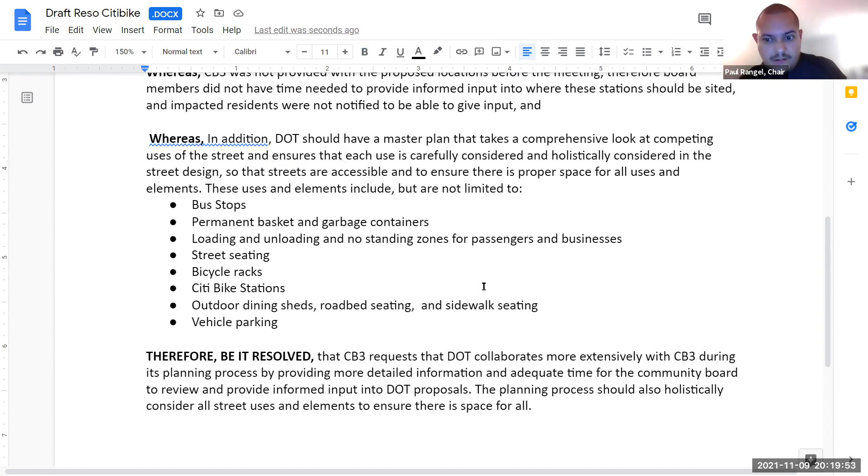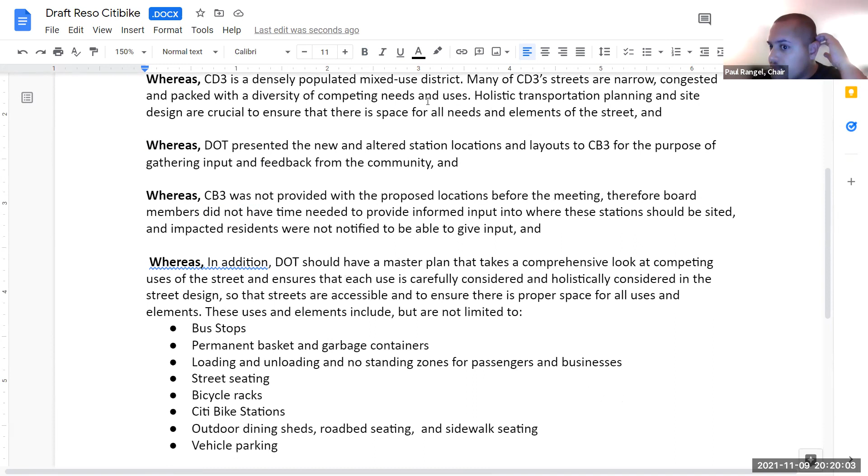All right, so let me just take the temperature here. David already kind of said, even though he's on the thinking portion now, that initially he was against this resolution. Is that the feeling of the entire committee? I'm going to go around and ask, starting with who I see first. Oh, I see Michelle first. Michelle, you're against or for?

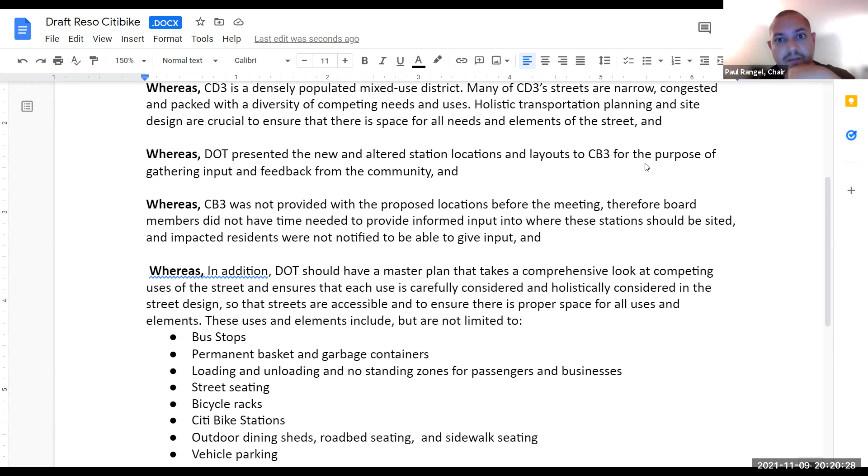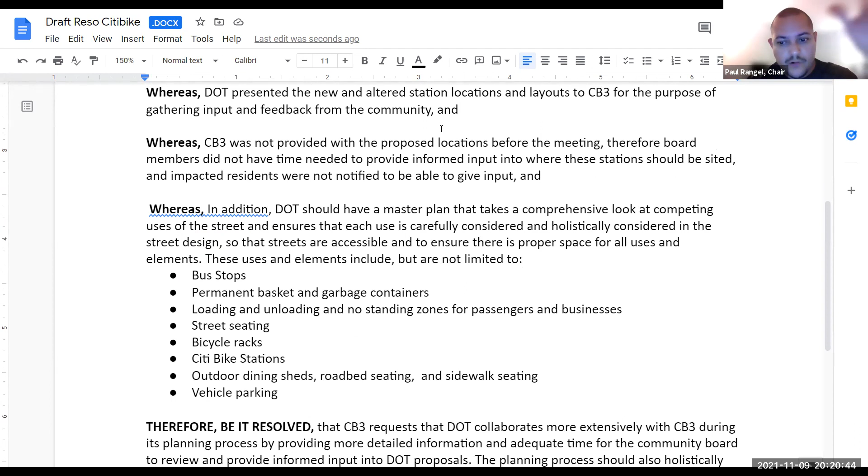She may have stepped away really quick, so I'll come back to her. Lee, are you against or for this as it is so far, without the additional change? You're for it, okay. Wendy, are you for or against going through with this resolution? If the resolution doesn't pass, then what happens? And then we just don't submit it. We just don't submit anything, right? Yeah, okay.

I am for it. Seems like... well, I'll come back. I'm just taking a temperature right now, not doing a formal vote.

Seems like you need some more information. So Lee says he's for. David said no, but kind of on the fence. Wendy said yes, but kind of on the fence. Kenyelle, what do you think? I want to say I'm with it for right now, but I would like more. I'd like to hear more about it moving forward.

What do you want to hear more about exactly? Let me ask that question. I guess I'm just still trying to wrap my head around everything that was said, and if this gives them the okay. Well, it's about the resolution itself and collaboration. This specific thing.

So I'll come back to you. Think about it, read it some more. I know it's up on your screen, and I'll come back to you. David, you have your hand up.

Go ahead. Yeah, a couple members have just asked, basically, are we approving them or what? I believe we have never taken a position on any proposal for Citi Bike in the past. The DOT comes and does a lot of getting input on locations, as they've done tonight at the meeting. And we've never actually supplied that input in any form other than the discussion that happens during the meeting. So anyway, that's just to that point. The resolution before us is not about approving or not approving of these locations. It is asking for better information in advance, which would be better.

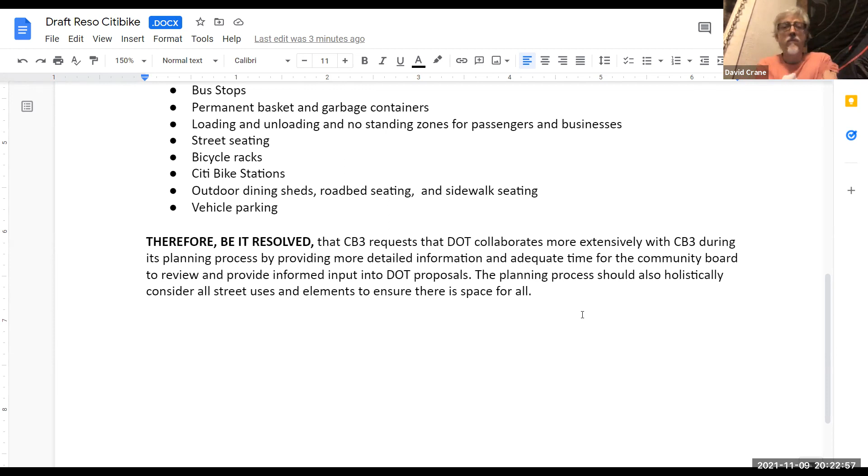I still think the resolution, I don't know, it's whiny. Okay. All right.

Michelle, I don't know if you're back. I know you had to step away. I'm just trying to take everyone's temperature as to how they feel about this specific resolution.

Paul, how do you feel about this resolution? Oh, you're putting me on the spot, Lee. Why are you doing that? I was gonna get to it. I like to let everybody go first. First things first, I'm just... oh, it's a direct message to me.

Trevor just sent me some language, so give me a second. I'll put it in. I'm gonna send it over to Wendy. Wendy, I think it only came to me, so I'm just gonna give it to you. You can just throw it in there right now. It will be a further resolve clause.

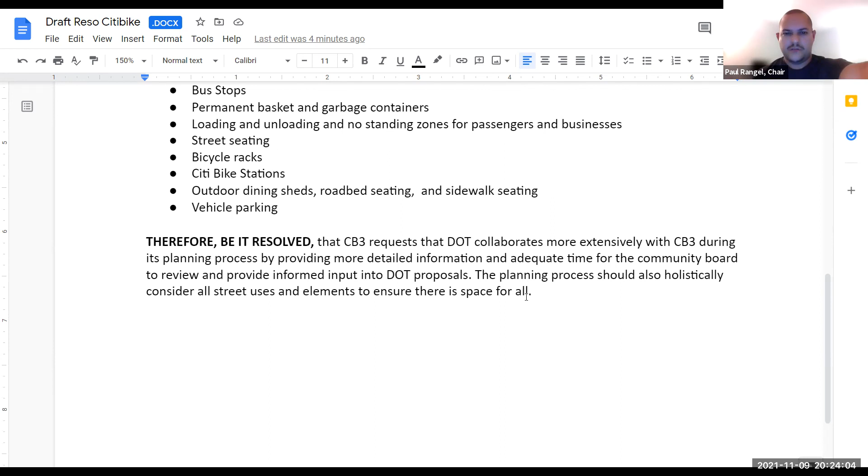Okay, so Lee, good question. My opinion is I actually am... I understand what you mean, David. I get it. I've been kind of lukewarm on this resolution. I'm leaning towards saying yes with it. So, going with it.

We can go to a formal vote in a second, but Michelle's got her hand up. She's back. All right, go ahead, Michelle.

Thanks, Paul. I guess I just don't really understand what the resolution gets us. Like, we don't typically write this type of resolution. In my experience, if someone wants to correct me on that, but like this, they know that they're supposed to do it. We ask them all the time and nothing ever changes. Like, I just don't really understand what the strategy behind the resolution is. Are they gonna... the administration is changing in like 2 months. I mean, that's what I guess. I don't really understand the strategic value of it.

That's fair. There's changeover. Susan, do I see your hand up? Go ahead, if you want me to respond to it. You can respond to it, sure.

Yeah, as far as strategy, you're right, we don't usually do it. And the fact that putting something in writing, particularly when you don't do it all the time, does give a lot of added weight. And particularly, it gets elected officials behind it also, because it's something that can so easily be done. So that's a strategy. And as far as the change in administrations, you're absolutely right, it would have to be presented to them also.

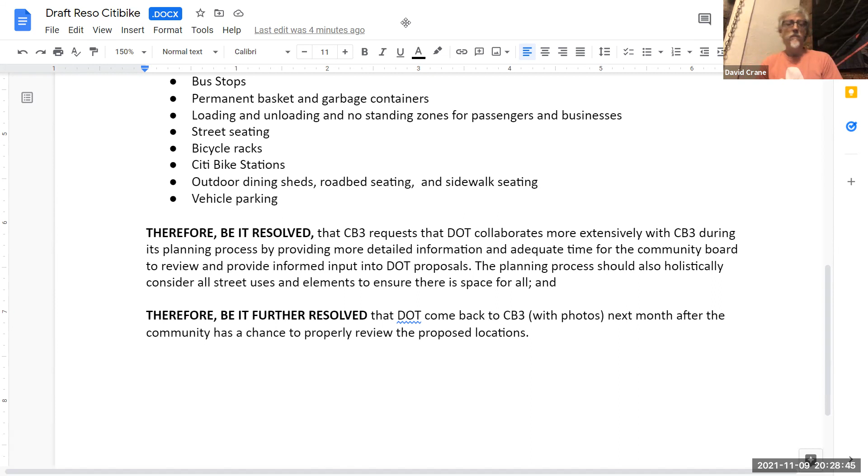So I'm gonna vote first on the clause, and then I can move it to the full resolution. On the clause: therefore be it further resolved that DOT come back to CB3 next month, which is December. Yes, no, or can I go by hands, David? Just take counts of. Okay, that's fine, I'll do it the same way I normally do it. So raise your Zoom hand if you want to leave this in.

Lee. I don't know how to raise hand because I'm screen sharing. I'm raising my hand. Okay, so Wendy's raising her hand, that's 2. Lee, that's 3. Kenyelle, you don't have your hand up or no? It's just for this clause, this therefore be it resolved that DOT come back next month. I'm for that. Okay, so I'm just being clear, so that's 1, 2, 3, 4. That's the majority, that stays in.

Okay, I'm just going to move this actual resolution to a vote right now, and that I'll go yes, no on. So Wendy, can you just shout it out to us in attendance?

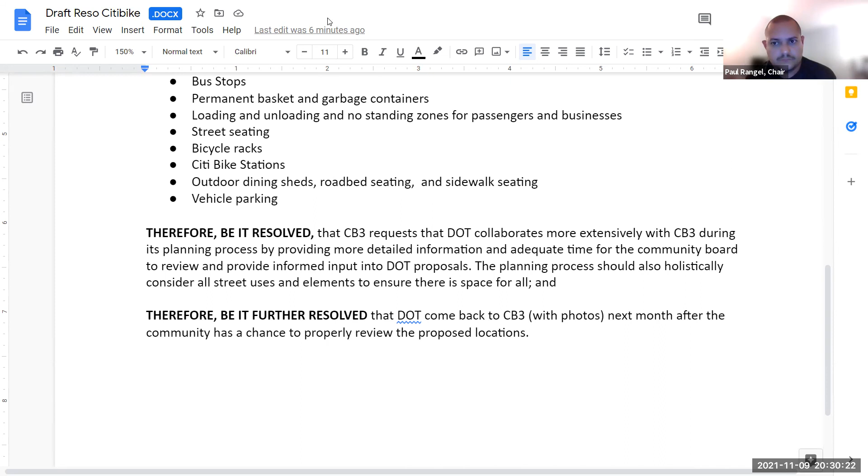Oh my goodness. David, when it's tied, it doesn't go through, correct? Right, it lost. Okay, all right, that doesn't go through.

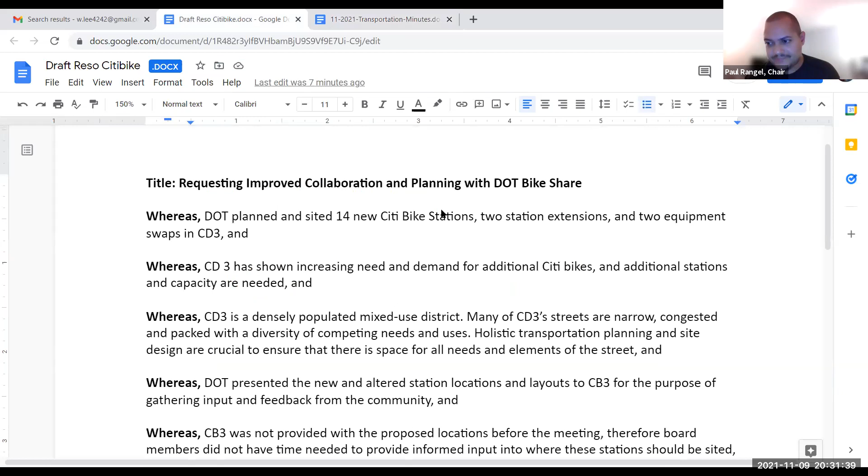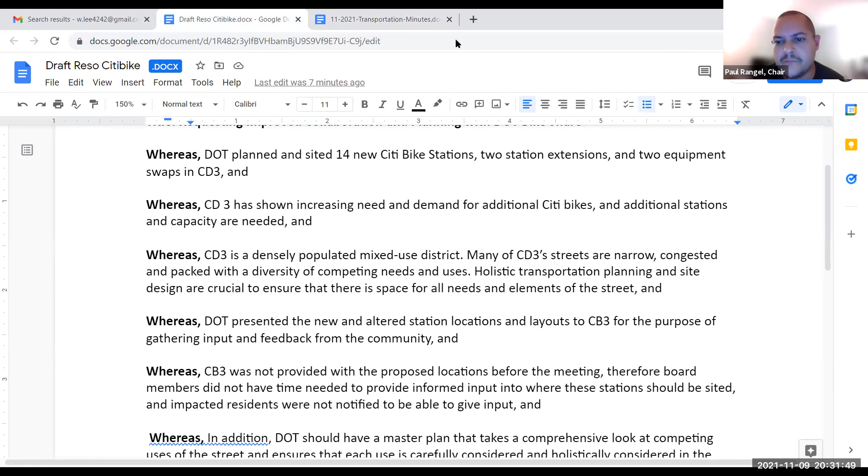Yeah, so don't worry about anything else, you can take it down. All right, thank you everyone, we're done with this agenda item. Thank you to DOT and to everybody from Citi Bike for coming on. I appreciate it, and to the members of the community who asked questions and consensus.

Trevor, your hand's still up from before, or? No, I just have a quick question. Since the motion doesn't pass and we really didn't get any input, I would just ask Mabel, how do we contact DOT as a community person? Because now this is outside of the community board to give meaningful input on these locations. Do we contact you directly or Jennifer? Yeah, Jennifer would be the first point of contact. We also have a bike share email that you could email us, but I think it would be most direct through the borough office. Yeah, the bike share email, I never got responses on the other locations for Clinton Street, no responses whatsoever. So I'll just email Jennifer directly. It's just good, sad that we couldn't do it through the community board, but that's the way it works.

Thank you, Trevor. All right, we have one more agenda item tonight. I guess it's an update on the neighborhood loading zone project.

So DOT presented the neighborhood loading zone program to the committee back in May of 2021. The goal of the neighborhood loading zone is to repurpose parking spaces to allow loading and unloading from 8 to 6, Monday to Friday. Residential parking is available before and after those hours and on weekends.